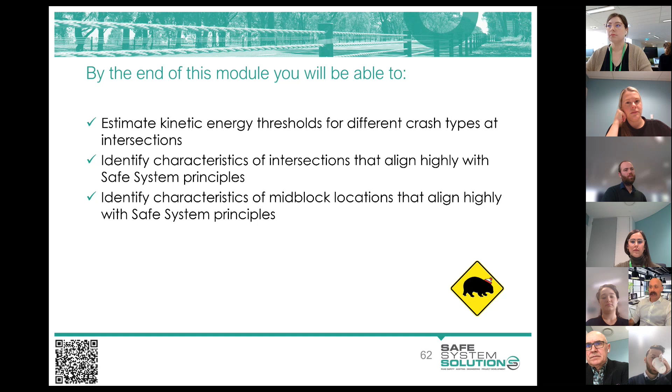So where are we at? Module 2. Okay, this one, we're going to delve a little bit more into those kinetic energy thresholds that we talked about. So that's that physical force that humans can take in different crash types before we break, and we'll hone into that at intersections. We'll look at characteristics of intersections that align highly with safe system principles, and I suppose by default we'll look at what doesn't align safely, and characteristics of mid-blocks that align highly with safe system principles or don't. Now, what I mean by mid-blocks, that's a term we would use in the engineering of a road environment. It is anything between intersections. It's mid-block. Now, don't forget to count your wombats, of course, and you would have seen that as one of your questions.

All right, here's a little first chance for a prize. There's an international formula for risk. Does anybody want to have a guess at that? Risk equals something and something else. Anybody want to have a guess at it? Type it in. No marks off if you get it wrong, but just a chance to win prizes if you get it right.

So it's likelihood times consequence, the international definition of risk. Now, this is not just road safety risk. This is risk: financial risk, health risk, environmental risk. It's really boiled down to the idea of what is the chance a bad thing is going to happen, and when it does happen, what's the magnitude of badness of that thing? So if you take economic risk, what is the chance the economy will go bad, and then how bad is it going to go?

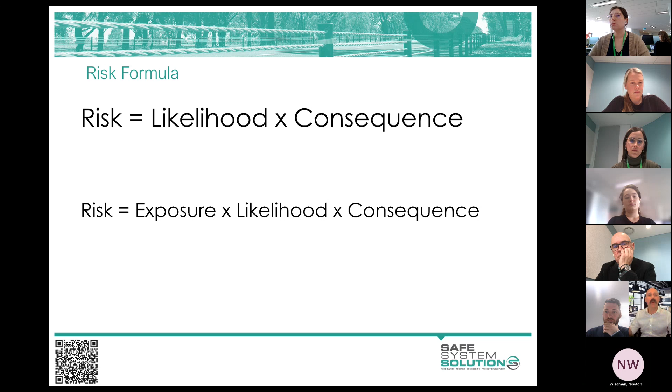What we've done in recent times is taken that likelihood and extrapolated out two elements, because in road safety we've identified that likelihood times consequence works quite well at isolated spots. But if you're trying to manage a whole network, you want to be a little more refined in how you come up with that likelihood. So exposure was embedded into likelihood before. I don't know why I got those extra little lines in there. It doesn't matter.

Likelihood always included exposure, but now it's separated out as a couple of elements within a safe system assessment, and it's actually filtering into quite a few other things in road safety. What I mean by exposure is really just how many people are exposed to that crash type. How many are driving through that intersection? How many are walking across the road there? How many are riding through? It's just the pure numbers of people exposed to that potential issue.

The likelihood then comes down to the characteristics of the road environment, the speeds of vehicles, the alertness or not of drivers and pedestrians, at that individual level. The consequence is how bad things are going to be. And what we do, especially in looking at infrastructure and how well it aligns with safe system principles, is analyze each of these: how many people are exposed to crashes here? What's the chance a crash is going to happen? And when it does happen, how bad is it going to be? And we actually multiply these out.

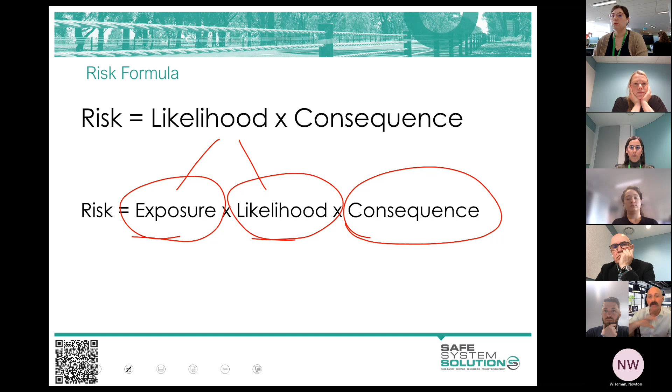Later on, maybe early next year, or if the world allows us, maybe late this year, I'm hoping to get there in person, and we'll go out and we'll do some safe system assessing, which is really putting this into practice in more detail. But for now, we're going to get you to do a little practice exercise on your own intersection.

So let's take each of these one at a time. And first of all, talk about exposure. Now, exposure, if you remember, is the number of people, whatever mode they're using, exposed to a crash type. Okay, and so if we can stop them being exposed to the crash, we change the exposure.

Now, Australia is just notorious for free access to fast roads, essentially. We love to just have all of our side roads feeding out onto our arterial roads, our state roads, our main roads. So this free access is leaving us with lots of exposure points to risk along our higher speed roads. And so what we like to do as a first thing within safe system thinking around the management of the road network is try to look at, can we start to close off some of these in order to leave us with one intersection with the higher speed, higher volume road that we can then address with some other measures to make it safe.

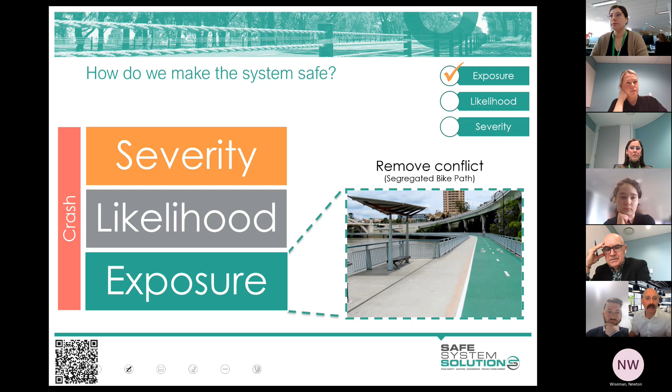So let's now jump to likelihood of crash. So that was trying to address exposure. Now, how do we alter the likelihood? These are things that we can put into the road and the road environment that help the human not crash. And this is actually one where we, as a profession, those of us who have been engineering the road environment, have got really good at it, and we've put a lot of effort into it over many years. We've really been going hard at this. And it's a wonderful combination of human factors and engineering and understanding vehicle characteristics as well.

There's so much subtlety in the road environment that people will never see and perceive. But there are obvious things that you see, like the line marking, the signs, the sealed shoulders, the audio tactile edge line. That's what people would often term a rumble strip on the side of the road. We call it audio tactile edge line. Technically, a rumble strip goes across the lane. So you may have driven over some rumble strips in your life. But that's just semantics. The community thinks a rumble strip is anything that rumbles as they go over it. So we'll just be aware of that.

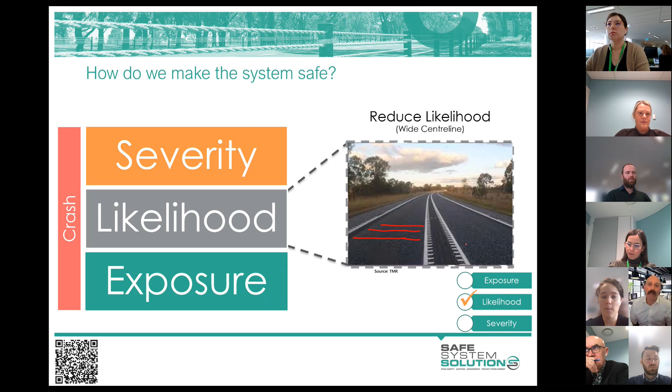And so anything we can do to bring them out of wherever they are and back to reality is a really exciting way to reduce the chance that they crash. And I'll talk to you about a few more things there. But another thing that can reduce the chance that people crash are the traffic lights.

Okay, so they do a pretty good job of telling people when to go, when to stop, and different ways that we can phase these and change them, and some exciting new stuff happening, like just a little one that actually, interestingly, we did about 12, 15 years ago, and it went quiet for a while, and then it re-emerged, which we call hold the red.

But basically what you do is, as vehicles are approaching, you have a radar that points at the vehicles, and you've got your traffic lights. So you've got red on the side road, and you've got green on the main road, and then the green goes to orange, and your radar is looking at the vehicles coming in and the speed that they're going.

And if your radar says, hang on, this one ain't going to stop, we call it a rogue vehicle. We go, this one ain't going to stop. Instead of your signals going to green on the side road and letting a vehicle into the intersection, we just hold everything red for a while until the rogue vehicle goes through this all red intersection.

We put a red light camera there as well, because we don't want to encourage this. But those sort of tweaks on what we've got there are amazing ways to reduce the likelihood of crashes. Okay, so those things are good. And signals are really good at reducing the likelihood of crashes. But they really don't do anything for the severity of the crash.

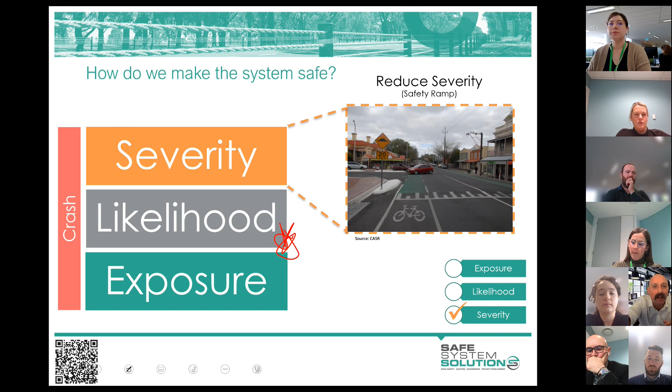And so you can see there on the screen, one is slowing vehicles down at the point that they could crash, and we call that a conflict point. At a conflict point, if we could slow vehicles down where there's a higher likelihood that they're going to crash, then we're addressing the severity as well.

Also, a barrier system. A barrier system is a wonderful severity device, because if you put a barrier system down your road, so take the Midland Highway, for example, lots of barrier going out there, you're actually going to get more crashes. You're increasing the likelihood of crashes, because all of a sudden now you've got something in the middle of the road and the side of the road that if you leave your lane, you're going to hit, right?

Beforehand, if you left your lane and you drifted onto the other side of the road, there's a chance that there wasn't anybody coming. In fact, it happened quite a bit. There was nobody coming. You'd wake up, you'd go, whoa, I'm on the wrong side of the road. You'd get back on your side of the road. You'd go, oh my God, all right, I've got to take a break or something like this, right?

Or you fell asleep, you drifted off and maybe overcorrected and shot over the other side of the road, into the paddock and just went, oh my God, right? There's no crash there. But when we put the barrier in, you're going to hit a barrier, right? There will be more crashes.

But the severity of crashes, so the ones where people weren't lucky and there was somebody coming the other direction, or there was a tree that they hit, or they rolled over in the roadside, the severity of those is so bad that now we reduce the severity so significantly because they hit the barrier and they run along the barrier and they dissipate their energy over time.

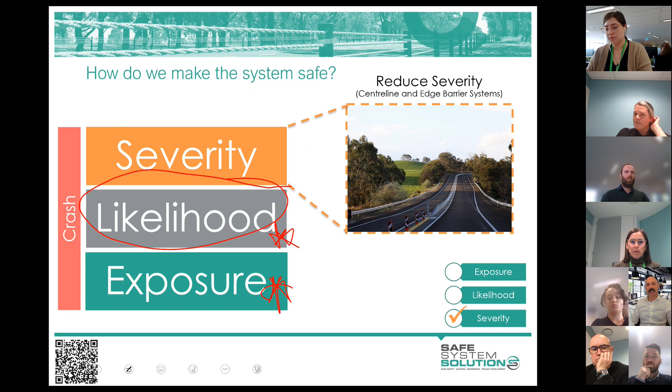Do everything we can to reduce the likelihood, but don't stop there. Say now, even though we've done all this awesome stuff to stop people crashing in the first place, there's still going to be crashes. How do we make sure those are within tolerable limits? So there are sort of elements to understand how we get good alignment with safe system principles. Anybody got any questions on that before I sort of hone in on intersections?

I have a question because I'm thinking about my intersection. Good. I'm pretty sure there's like a legal limit where you can have traffic signals in a row, isn't there? Like spacing. Is that right? There's not legal limits. There's guidance on how close they should and shouldn't be. You don't want too many close together for a number of reasons. It's mainly driven through traffic efficiency, the amount of stops that somebody would have to go through. So your traffic operations area is probably driving a lot of that.

From a road safety perspective, we don't like it for something we call a see-through effect. Because if you're approaching a set of traffic signals and there's another one very close, sometimes people will see the one in the distance and they'll run straight through the one close to them without sort of perceiving that. Yeah. Okay. But yeah, proximity is an interesting one. So the one you're thinking about's got some close signals together?

It's got some close traffic signals, but one of the traffic signals is for a pedestrian crossing, not for traffic control of cars or anything, and then there's an intersection up the top that has cars coming through that is quite dangerous. And I think there should be lights there rather than down near the crossing. But anyway, I'll show you. Okay. That sounds like a really good one for you to do a little bit of thinking about the severity and the likelihood, the exposure. So yeah, that'll be good.

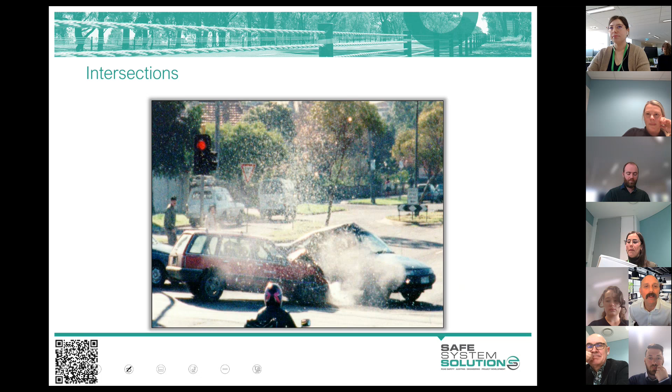Let's talk about intersections in a little bit more detail, and then I'm going to get you to do a bit of thinking about a hypothetical intersection, or actually it is a real intersection. So these are some high-level principles that Monash University Accident Research Centre came up with, and I think that they are really nice thinking points around intersections. And interestingly, the first thing they say is, can you get fewer vehicles? They haven't even jumped to the intersection.

But can we do things like mode shift? Can we get people onto safer transport modes? Can we reduce vehicles going through this intersection? And that's quite an interesting starting point. We often think about that from lots of other transport objectives, getting people into lower carbon modes and those sorts of things, but fewer vehicles. Then into fewer intersections, which we talked about. Now, both of these are addressing exposure.

Then we go into fewer conflict points, and conflict points, remember I used that term, are points where crashes can happen. And this is into the likelihood. And then we get into the severity. We want to change speeds and angles to biomechanically tolerable levels. We talked about that last session, where we were looking for that 90-degree crash, that right angle crash, within 50 km/h or below. If we can get a little bit more angle on that, we can go a little bit above 50.

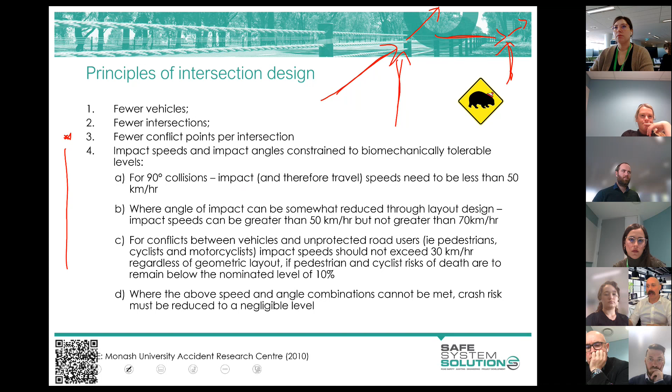And at around 80 kilometers per hour, we can't feasibly operate an intersection where we have that if it is a change in speed. We would call this a delta V. Again, I'm using some physics language here. Delta is change in, so your little triangle sign, delta, change in velocity, change in speed. I'll explain that, because we can operate an intersection well above 80 kilometers per hour, as long as we get the vehicles to be going at similar speeds.

This is like an on-ramp, right? You can operate an on-ramp and the intersection there very fast, 100, 110, 120 if you want, as long as you give the opportunity for one vehicle to get up to speed, so when it hits the other vehicle, there is not a speed difference that is outside of our tolerable limits. So accelerating vehicles has this wonderful benefit from that exchange of energy perspective.

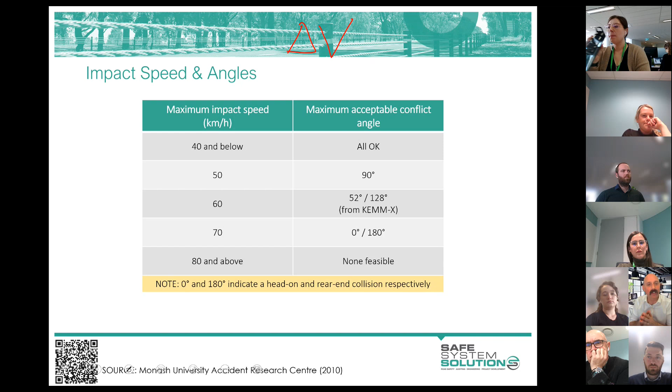So we often look at the angles that crashes could happen at an intersection and we often would draw diagrams. Here's a new intersection being planned. So we just quickly angle it out and say, yeah, okay, that's going to be about 100. And this is very precise, but you don't even need to be this precise. You can just go, yeah, okay, a vehicle coming out, one hitting it, that's about 90 degrees. As they turn, it's going to be a bit more shallow angle. And we can look back and we say, okay, 90, that's about a 90-degree crash, about a right angle.

Okay, well, can we aim to get speeds of those bullet vehicles? Those bullet vehicles being the ones that are going to do the damage. Right? The ones coming out aren't bullet vehicles. They're target vehicles. They're the ones that are going to be struck because they're not going to have the speed because they're facing a T intersection. They're going to slow down. The bullet vehicles are just traveling along. What's their speed? Can we manage their speed to within around that 50 kilometers per hour mark? And the other side of the road, we could probably get up to 60 kilometers an hour if we wanted, because you're going to get more angle on that crash when it happens.

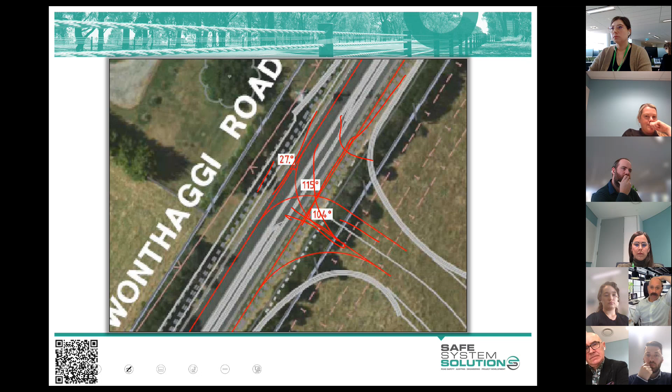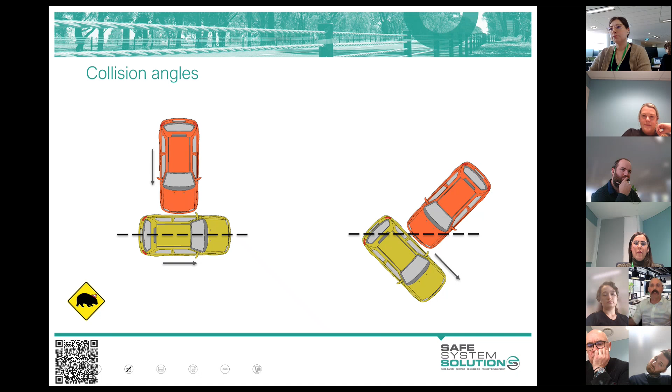The other thing we sort of need to think a little bit about are these secondary crashes that I alluded to. So we have immediate conflict happen between passenger vehicles, and then at an intersection, they will often go into a secondary crash. And this is some research that was done by the Centre for Automotive Safety Research in the University of Adelaide there, CASR, showing a vehicle, and you've got a vehicle and they come in and they meet at an intersection. So they sort of replotted all these crashes that had happened.

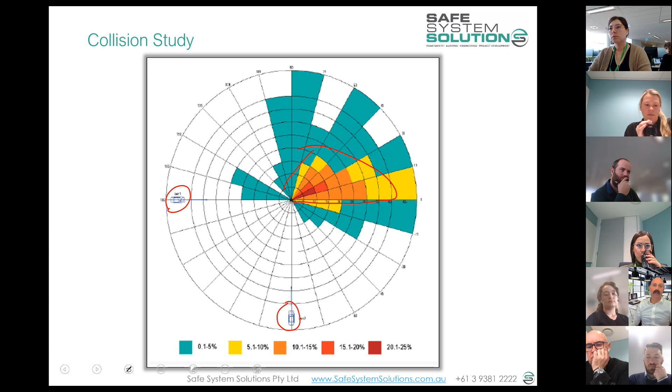And the secondary crash where death and serious injury occurs, fairly obviously out there. I don't know if they needed the research to tell us this. It's fairly obvious where they're going to go. Occasionally you get some clip off and people avoiding crashes and the like, but generally that's sort of where we're going. So we need to think about the rigidity, how harsh the roadside is around intersections as well. It's not just that crash between the vehicles.

Anybody got any questions before I jump into a little exercise and make you do a little bit of pondering? Okay. So here is an intersection. And I'm going to talk you through it, explain a little bit about what it is, show you some pictures of it. Your job is going to be to redesign this intersection and to eliminate death and serious injury into the future, or get us as close as we possibly can to elimination of death or serious injury into the future. Okay, you're going to get a certain amount of information and I'm going to be able to answer questions for you, but you're going to come up with ideas on how we do this. And I'm going to constrain you with a few little things.

So this road is a major road, right? It's a major highway. It carries 20,000 vehicles a day. It carries trucks, buses, motorbikes, cars. And it's got a 70 km/h speed limit. This is a bus stop. This is a shared path, bikes and pedestrians. These are all houses, residential area. This thing here is a culvert, so it's a drain. Basically, the water goes under the road at this location, so it sort of flows in here and floods out into this area when it rains heavily.

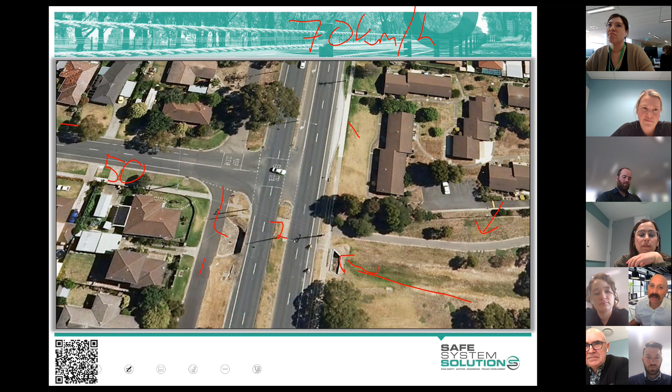So that's the second constraint. And the third one is, you are operating in the current political and organizational environment that you're in. So if you propose something highly radical here, and I encourage that, I might ask you a little bit about how are you going to get that through the Department of State Growth system, and convince the traffic engineers and convince your minister and the local member and the community. Have you got any tricks, any ways that we might be able to get this one in?

So, you know, if you say, well, it's 70 kilometers an hour, I'm going to make it 20 kilometers per hour through there. I'm going to say, okay, big speed reduction on our major arterial road, and it could be quite controversial, very controversial, I'd say. What's your plan? How are we going to get this through? So there are your three constraints. You got $3 million. You can't close the intersection. And you're in the current political and organizational context.

So how much for a roundabout? What a lovely question. Okay, Austroads has some guidance on how big a roundabout should be at these locations. And in order to get a roundabout that meets the Austroads guidelines, it's going to cost you $7 million. I know, that's a lot, isn't it? And you might go, surely it can't cost that much. Well, it's a very big roundabout, because we've got to get the biggest vehicle, a B-double, which is a truck with a second trailer behind it, to be able to turn around this. And in order for that to happen, it needs a huge area. So we're actually going to have to build this big roundabout.

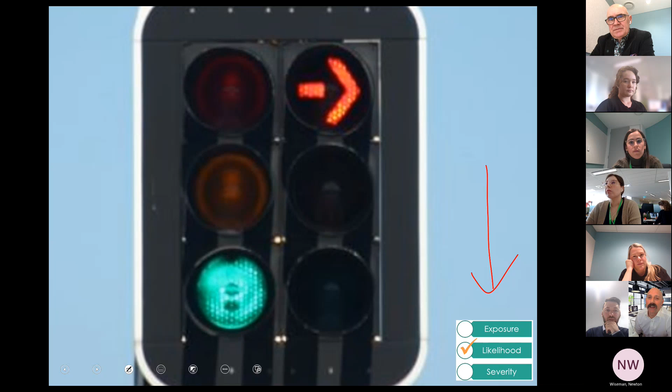The idea of traffic signals came up, and the idea of a roundabout came up early on, and then we decided that was too expensive. But traffic signals came up, and I've got the little reminder here, that they are a likelihood treatment, right? And they do a good job. We know that probably at an intersection like that, we will reduce the fatal and serious injury crashes by about 45% with the installation of traffic signals. Right, but that leaves 55% still happening, doesn't it? So that's not good. We don't want that.

And I did this little heat map, and this is just using publicly available data for death and serious injury. I've done it for outer metropolitan Melbourne, but you can do it for outer metropolitan Hobart or Launceston or Burnie, anywhere where the speeds are a bit higher and you've got traffic signals. Each of those hotspots is death and serious injury. So these are where people have been killed and seriously injured, and the bigger the spot, the more people are being killed and seriously injured there. Every one of these is a signalized intersection.

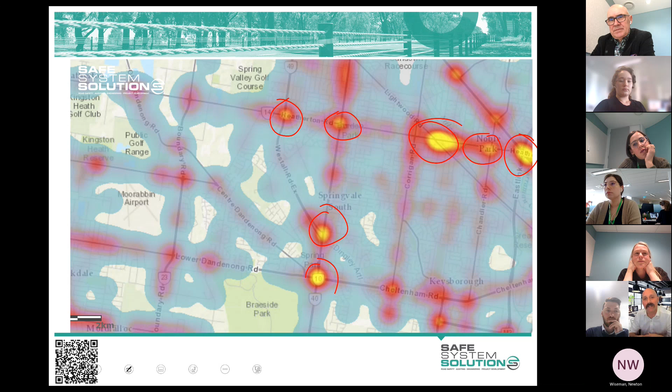And it's quite interesting because we think of traffic signals as sort of this ultimate form of intersection treatment before you can actually do a grade separation, a flyover, an overpass, right? So we get to that point. And then we sort of go, well, if they can't stop when it's a red light, come on, it's on them. But the reality is that our safe system says, no, we've got to do something about this.

And there is a certain stupidity in us continuing to build signalized intersections in high-speed areas and somehow expecting that they're going to perform and people aren't going to run the red light and aren't going to have crashes and be killed and seriously injured. We know it's going to happen. So this is quite an interesting change.

And I spend a lot of my time now in robust discussions with traffic operations engineers because they love a set of traffic signals because it gives them more control over the network. They can turn this one on and move this one around and tweak their pattern of flow and how things move. But we've got this residual death and serious injury that we need to start acknowledging and addressing.

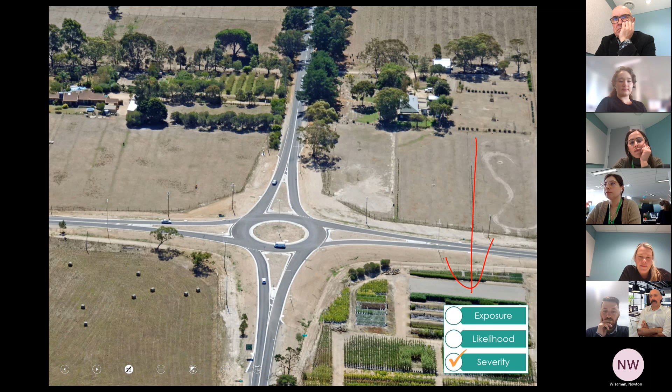The roundabout. Now, this is an interesting one, isn't it? The roundabout addresses the severity of the crash. Okay, now we're into something. Now, why does it address the severity of the crash? I'm going to come back to that shortly. Roundabouts don't need to be that big. I said, well, if we're going to follow Austroads, it's going to have to be big. And yes, Austroads does that, but we can have small roundabouts, very small roundabouts. Obviously, a very different road environment here.

But you can have small ones. You can have ones like this that you don't even actually have a roundabout and you've just got a painted roundabout. I mean, it is a roundabout, but you could just drive straight over that if you're in a large vehicle. And sometimes we put ramps on the approach to slow people down at the roundabout and those sort of things.

But why are roundabouts better? Why do we see actually around 80% reduction in death and serious injury if we had put a roundabout at that location, whereas with the signals we were only getting 45%? Roundabouts are hugely superior in terms of their safety for passenger vehicles, right?

This is a conflict point analysis, a very simple conflict point analysis. Each dot there is a way that a driver, and this is just for vehicle to vehicle, can be killed or seriously injured. Or they can crash. The red ones are the crossing ones, which are worse. But you see there, just the sheer number of ways that you can crash at a roundabout is far less compared to traffic signals. So that's one big advantage.

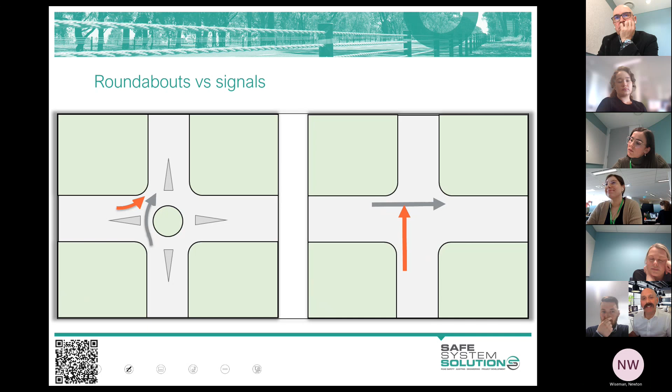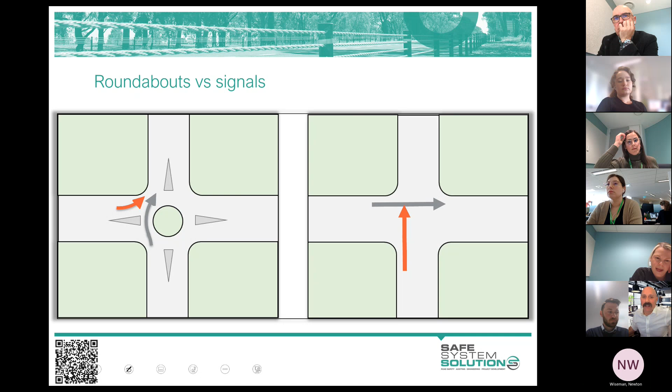The second one is the angle that we crash at. And remember, I talked to you a little bit there about your vectors and the energy. We're getting the angle now. So that's a much better one at a roundabout. And this one sort of intertwines two things. One is speed. And the second, with the yawning person, is that amazingly, when you put a roundabout into an intersection,

people approaching it in their completely phased out state of mind, they come back to reality. They look around. They slow down. It's like we bring them back from wherever they are and they're present. And they then are looking around and they slow down, and they have to slow down to navigate the roundabout. So this is just a wonderful win.

Unfortunately, with a set of traffic signals, we have a bit less of that. There is a tendency for some people to just drive straight through a red light. They just miss it. They just drive straight through it at the speed they were going. And sometimes they even accelerate through it because they are catching the end of it, or in the rut, and then off they go.

So a roundabout is just this wonderfully superior intersection treatment from a passenger vehicle perspective. We'll talk about cyclists and pedestrians and how to make roundabouts safer for them in the next session. But roundabouts are really wonderful. Any questions or comments at this stage?

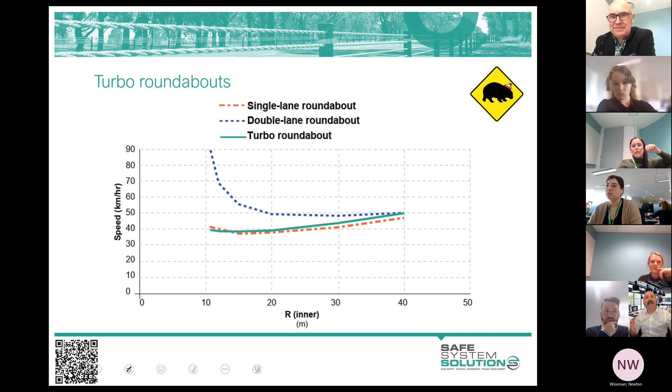sometimes we like to put signals around a roundabout. What's the roundabout in Hobart there on the way in, just over the bridge and down? It's a signalised roundabout, isn't it? It's a good one. Does it have a name? The railway roundabout? Railway roundabout, that's it, yes. So we can signalise roundabouts and we slow people down and we get better performance. But with multiple lanes it starts to get a little bit more challenging, and you have a few different troubles.

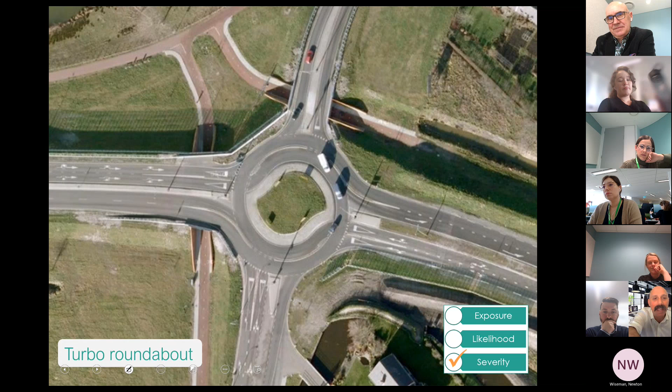I just thought I'd show you out of interest. You may not have ever seen this. This is what we call a turbo roundabout. It's actually got separated lanes within a roundabout. On the approach and through the roundabout, you separate out the lane. So you want to do a right turn, you get into the right lane and you go into this separated area and you continue around and out.

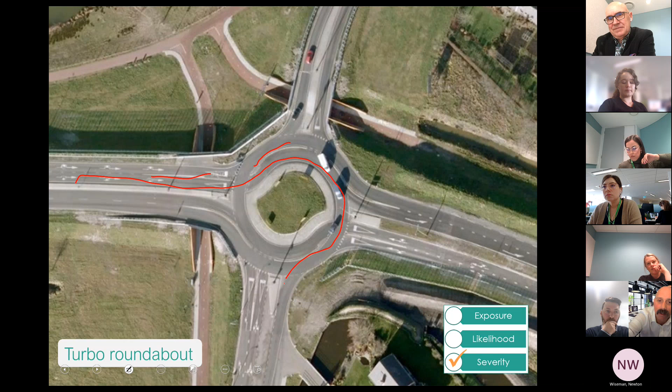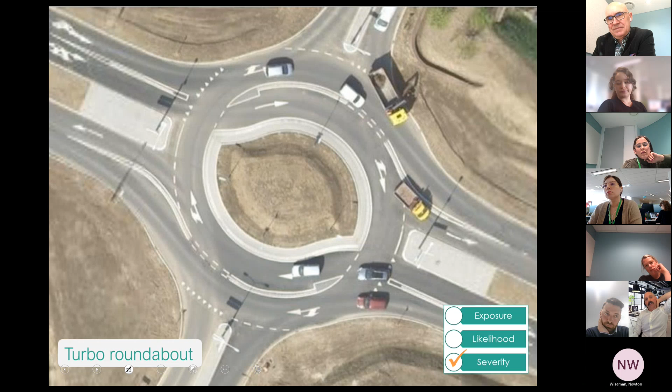It's quite sort of new stuff. We've got a few of them now in Australia. They're a bit rare in Australia. I love this photo because you've got a nice turbo roundabout, and look here, you've got a truck that's obviously come out. You've got a car going in there, and what I'm seeing here is low speed. I'm sure it will be low speed, right?

And the angle is just beautiful. So if that car does hit that truck, at a nice angle, we're going to have, you know, a bounce off, right? It's just good from a safety perspective. Of course, people are making mistakes and come out when they shouldn't. But if this was a set of traffic signals, we'd have the same sort of mistake making. It would have been high speed, and it would have been potentially death and serious injury. But it's all happening now slow and at good angles.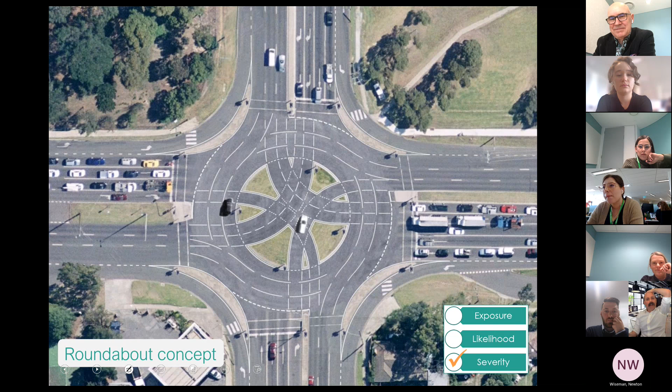And we then start to get interesting ideas for signalised intersections. Sorry, this is a mock-up. This hasn't been built. But the reason people are coming up with these ideas and these mock-ups is because there's an existing signalised intersection, and they're saying, how do we slow vehicles down and improve the angles, but still get this capacity? How do we still make the traffic operations engineer happy enough that we're still going to pump as much traffic as you need through this, and you can still control things with your signals?

And so the idea is that a vehicle approaching here will switch back on. They'll wake up because there's physical stuff there. They'll improve their angle a bit. So if we have crashes, they're going to be better. They're going to be slower. So lots of exciting concepts coming up. And they're all around us now, starting to say, how do we reduce the severity of crashes if people are going to make mistakes at these signalised intersections?

And Craig made an interesting point about, could we do something raised? Could we do a raised intersection, a raised platform, a raised something there? Is that another way to slow people down through this intersection? And that will address the severity of the crash. The signals themselves are going to reduce the likelihood, but now we're looking at the severity as well. And that's what they proposed at that intersection you were looking at.

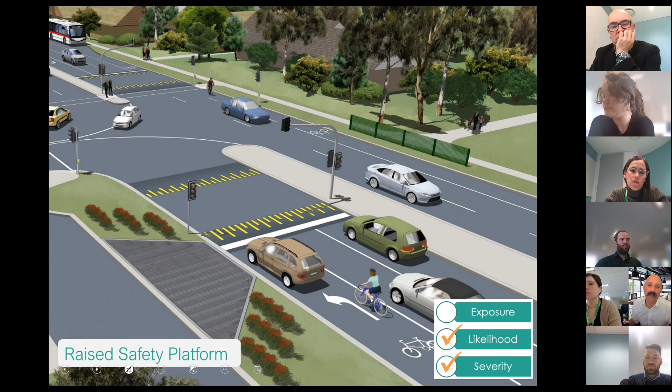And it just sort of dawned on me especially, I was like, these people are crazy, because when that roundabout's in, they're going to have to go through there at about 50 kilometres an hour. It's going to be more impact on them. But they just see that as their choice to slow down rather than us mandating it on them. So if you're able to utilize infrastructure to get your speeds, it's sort of better.

So then they built that, and there it is there. And you can see there the 50 km/h advisory speed. That's the one, hey, that's what we suggest you do. You don't have to. We're not going to fine you if you don't, but there it is. Another 50 there, and lots of advanced warning, telling them go 50, speed hump, raised platform coming up. I should have said speed hump.

In fact, that's one thing I always point out: this is not like your local urban street speed hump. This is a more gentle platform, right? We're trying to get vehicle speeds to around the 50 on this one. And we can just tweak the angle of the ramp to get different speeds that we want.

And the reason they chose 50, and have a think about 50, 50 is that right angle car impact threshold speed. So if a car comes out of here and is struck by a vehicle here, well, let's bring it into 50, and it's that tolerable sort of speed. Now, you're right to point out pedestrians and cyclists, they're not going to get the benefit of that. There was a lot of analysis done on which is the riskiest road user. I didn't give you all the volumes and things like that, but that's the one that they were targeting.

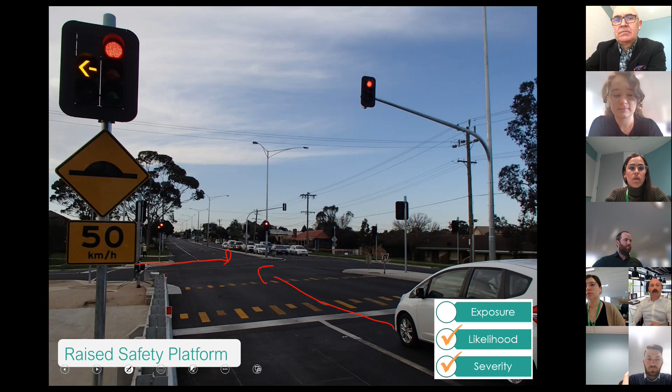And I love this, this is just a beautiful picture. Cars braking on the approach to a green light. And people sometimes go, oh, that's just inefficient. I'm like, well, at a roundabout, we've got no problem with braking and slowing down and then accelerating up, do we? We just have never had to do that at a signalised intersection. But it's wonderful. So these are really exciting, and we're absolutely loving them.

There's another thing in road safety, and we call it the dilemma zone. And I guarantee you've been in the dilemma zone if you're a driver. The dilemma zone is a point in time and space when you are in a dilemma as to whether to put your foot down and go through the traffic signals or brake and stop because they've gone orange. Its official term is the dilemma zone. It's a lovely name, whoever named it.

But what we find is that the dilemma zone significantly reduces with a raised platform because people just decide to stop. It pretty much makes your decision for you. It goes orange, I'm going to stop, because if I put the foot down, it's going to damage my car and I'm going to jump up. And now we're seeing raised safety platforms being deployed widely at large signalised intersections in Victoria especially, and New Zealand. Tassie hasn't quite got on board yet, but I'm excited for it to happen.

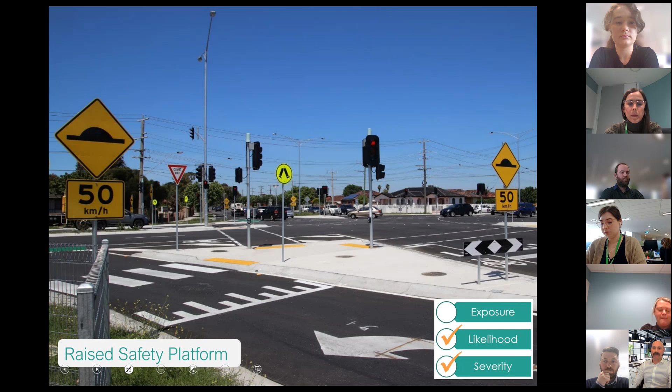And really, the running of red lights, we don't want it to happen, but it just continues to happen. You can put up red light cameras, you can put up mast arms, you can put LEDs, do good line marking, people still run the red light. There are a few less that run the red light, but this still happens.

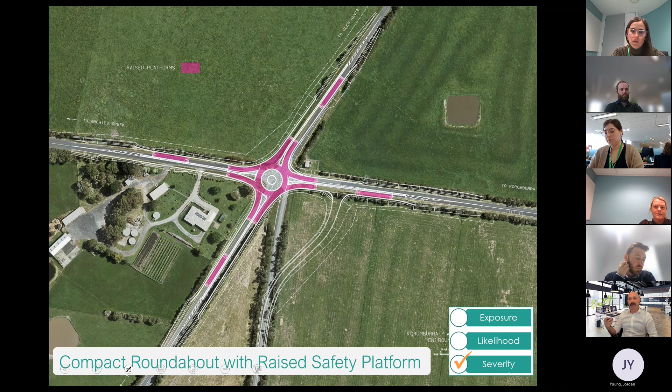I'm not going to talk to you long about this one either, but essentially, we talked about roundabouts, and it's really important to try to continue to look at how do we get roundabouts in if we possibly can. Now, this one's more for your traffic engineer, road design, highway design engineers, they really get excited about this one. But essentially, it's a smaller roundabout than it should be, much smaller, okay?

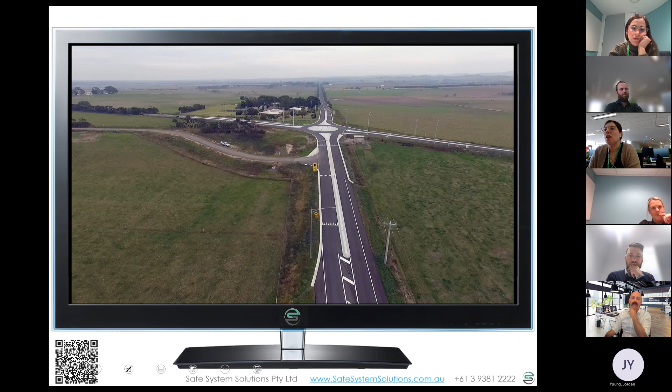So the roundabout really should be sort of this big, and then you'd have these reverse curves in. So you'd be acquiring big bits of land and lots. You'd probably have to buy this house out and the like. But they're starting to say, how do we get a similar thing where people are approaching this intersection, they don't believe they have ultimate priority, they wake up, they slow down. Anyway, they built this, what is called a compact roundabout.

And here's a little bit of drone footage for you. You can see it's actually a very small roundabout in the middle. Very small, tiny roundabout in the middle there. And then it's got what we call a concrete apron. It's actually a big concrete area that trucks can drive over. So that reduces our need for that massive roundabout for them to go around, because they can track over that.

So we talk about a swept path of a vehicle. Basically, if you ever get to watch a big truck turn a corner, you see how wide they need to go and they sweep around. It's called their swept path. And so we're trying to cater for that in different mechanisms. The traditional way is to make your roundabout massive.

But these are pretty exciting techniques to try to reduce the cost, right? This one was done for about 3 million. Still expensive, but when we're talking about usually 7 million or so for something like that, we're getting some good savings. Questions, comments at this stage?

I need to go to the bathroom. Okay, let's have a short break. Actually, I sort of skipped the break. I usually give you the break when you're doing your exercise. So we'll take a short break, and then I'll whip through a few things at the end and then tell you your assignment. So let's take a few minutes now, and then I'll ease back into it.

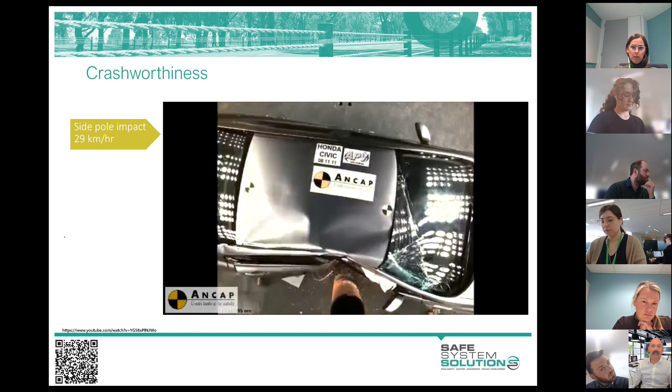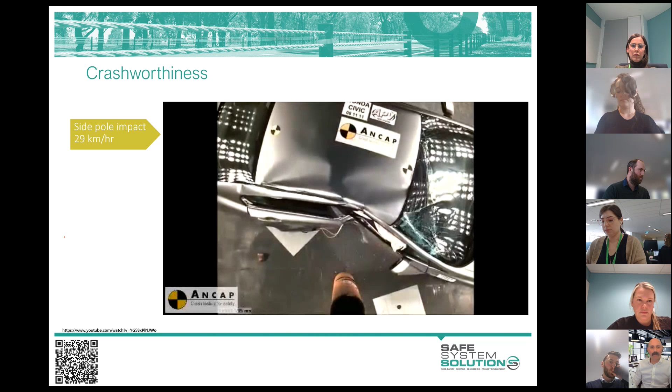We know that side impact into a pole or a tree is highly severe. So there's the ANCAP 29 kilometre per hour test. It's gone up to 32 kilometres per hour, as I think I mentioned to you. It is not fast. The side of a vehicle striking a tree is a horrendously violent event. And our cars are not designed for it.

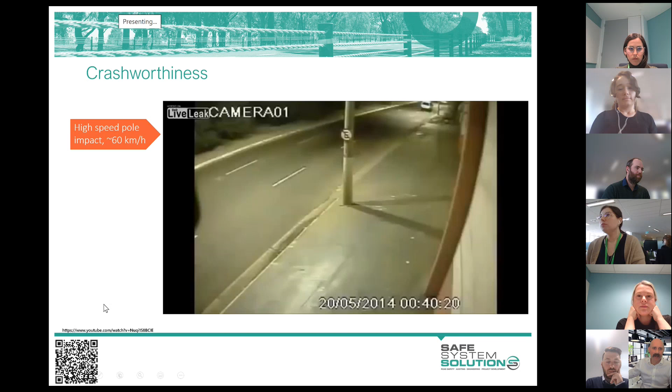This has been estimated from the video frames and that sort of stuff as a 60 kilometre per hour crash. Now, this is sort of showing the violence. So you can see the energy dissipated, and that's estimated at about the 60 kilometre per hour mark.

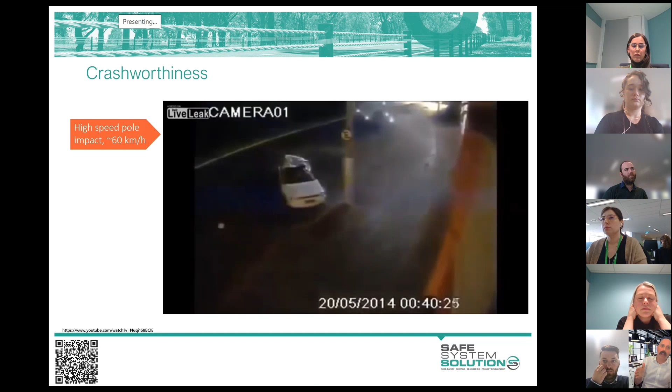So we know that when we've got roads operating at 100 kilometres per hour and we have people falling asleep and leaving the road, it's not this clean, clear drift off into a tree. The mechanics of a run-off road crash or a head-on crash most often is the driver falls asleep. They drift off the road because we usually make our roads camber out a bit so the water drains off. They wake up and they're off the road, and they panic, as you would if you're off the road traveling at 100, 110 kilometres an hour. And their first instinct is to pull the wheel back and get back on the road.

And what that does is it starts the vehicle yawing, and yawing is the sliding. And then they go into this sliding motion. So what we're actually doing is exposing the side of the vehicle to trees, to power poles, and the vehicle to a rollover mechanism. Sometimes they yank the wheel back and they fling straight over the road. So we get run off road to the right. Even though they drifted off to the left, they run off road to the right. Sometimes they head-on crash as they come over.

So it's actually quite a chaotic scenario. Often people just imagine it as a driver's asleep, they drift off, they hit a tree. No, it's out of control. And so that's why the side of the vehicle becomes so interestingly important.

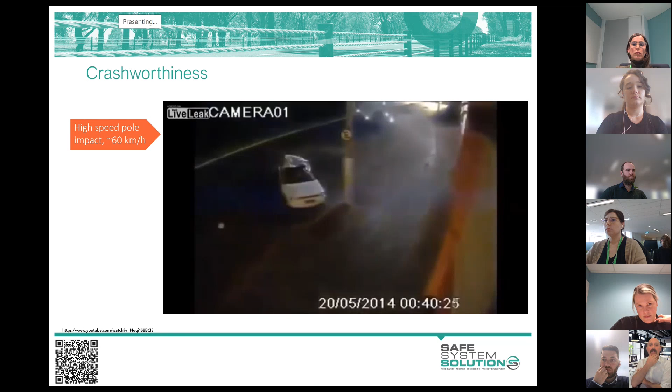So the past technique used to be to create this thing called a clear zone, right? A clear zone used to be an area from the edge line where you clear all of your trees and power poles and anything fixed. And we used to calculate clear zones. For high speed roads, it was like 9 metres from the edge line, maybe 10 or 12, depending on whether it was on a curve or not. And back in the day, that was probably the best we could do.

Nowadays, we have amazing barrier systems that actually perform better than clearing those trees. So hitting the barrier, if the barrier is about 4 metres from the edge line, is far safer than taking your luck in this cleared area, because some vehicles will go further than that. Some vehicles will still shoot back onto the other side of the road. And some vehicles are going to roll over. As they try and get back on the road, they start sliding, the soil catches on their tyre and they'll start rolling. So clearing the roadside helps, but it doesn't eliminate death and serious injury.

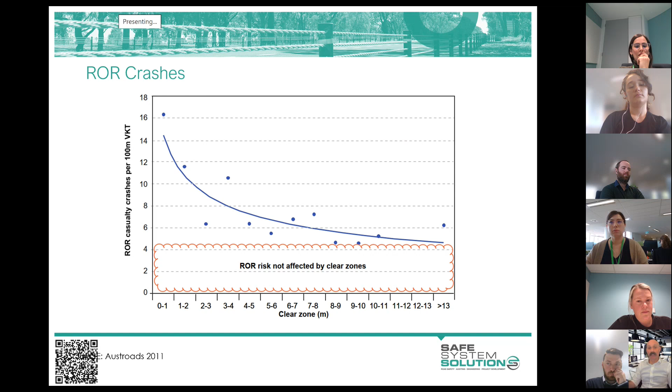It doesn't get us anywhere near as close as putting a continuous barrier system in. The other thing is that we are not in the space of chopping down trees anymore, right? That's not what we want to do. And so we can get a safer outcome. We can save more trees by just putting continuous barrier systems down, and we can save lots of lives.

So clear zones have been an absolute institution since about the 1960s in the management of a road and roadside. So it's another one where your institutional traffic engineers and road designers will say clear zone is what they've always done. And so to tell them we're not doing clear zones anymore because that's not the best thing we can do, they get angry.

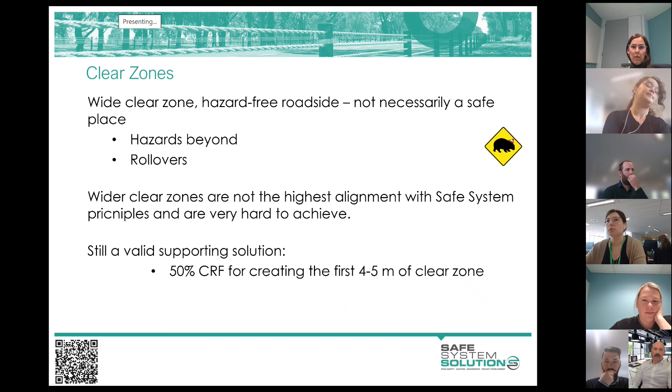But they're not necessarily a safe place to be. And they're not going to give us the highest alignment with safe system principles, but they do provide some advantage. But the reality is we pretty much can't do them anyway. So roadsides like this are kind of a thing of the past.

This is probably what they would have built the Midland Highway to if we hadn't progressed our thinking around continuous barrier systems and the like, which is basically you just duplicate the thing, you clear your trees out to 9 meters or 12 meters. You provide this big wide median and this area to recover. It's all good except for the 15 to 20% that don't recover.

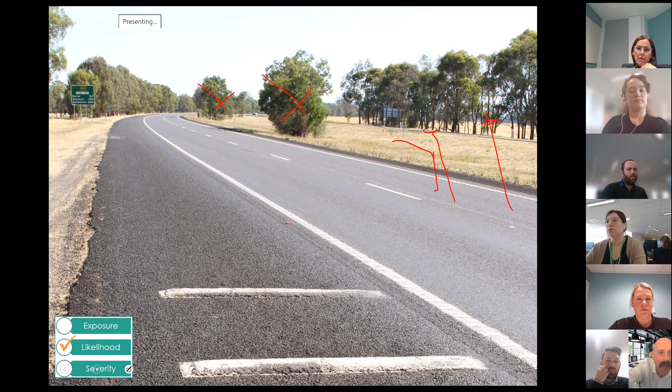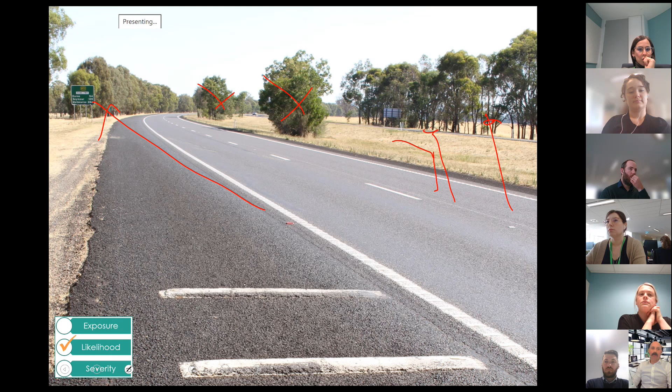They go all the way across, they hit vehicles coming, they go into those trees. And we have been for 50 years building these road environments, which are better, don't get me wrong. It's far better than 1 lane in each direction or 2 lanes in each direction with a separated centre line. But we can do much better with these narrower cross sections, less land, less trees chopped down, and these continuous barrier systems. And that's part of Austroads' new guidance in Part 6.

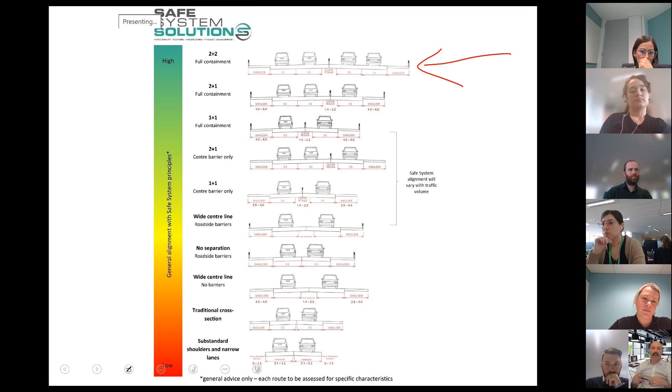But really, what we aspire to are these barriers each side. People call it the bumper bowling of roads. We don't want you to fall asleep, we're going to try and stop that, but we'll catch you. It doesn't matter if you've dropped your coffee in your lap, you're falling asleep, you have a seizure. The road is trying to protect you. So it goes down in safe system alignment from there. I'm not going to go into the detail, but lots of different cross sections.

You know how your fridge has an energy star rating? We do that for roads too. There's an international system for star rating the safety of roads. It's called iRAP, International Road Assessment Program. AusRAP is what we do. We do a lot of that official star rating; we're accredited to star rate. This road cross section, you can't quite see it, gets 4 stars. That's not bad, it's good.

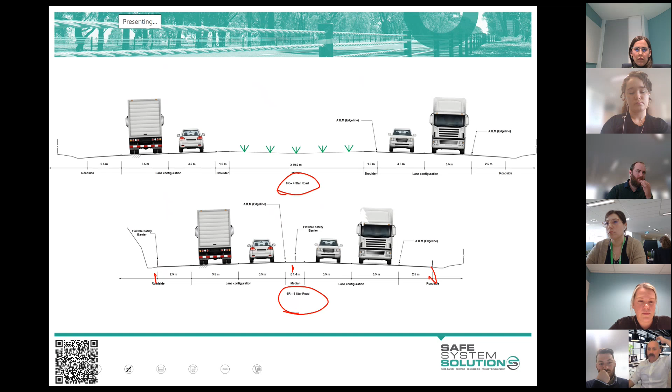It's far better than the 1-star roads, like that picture I showed you with the trees; that's a 1-star road basically. This is about a 4-star road for a whole lot of different reasons, clear zones and all of this. But this is a 5-star road, and it's got the barrier, the barrier, and the barrier. And that's basically what takes it from 4 to 5. So that's our ultimate style cross section.

But we've got to think about how we roll it out, the community interface. I'm sure you'll get kickback from the Midland Highway and other jobs where you roll out this barrier. The motorcyclists get angry. Sometimes you've got barrier too close to the road, and they feel they can't pull over if they break down. We need to get better at this as engineers, and some of your roles are going to be in a good spot to help us, because a lot of engineers just look at the data and say this scenario is extremely safe, but the community doesn't see it that way. They get very angry at this.

The reason it's very safe is the biggest risk on this very low volume road before those barriers went in was leaving the road and hitting trees. Head-on crashes were unlikely because there wasn't likely to be another vehicle coming. Putting this in, yes, there's an increase in risk if you break down, or the kid in the back throws up and you pull over, that a car will run into the back of you. But it's actually quite low risk from a pure data perspective.

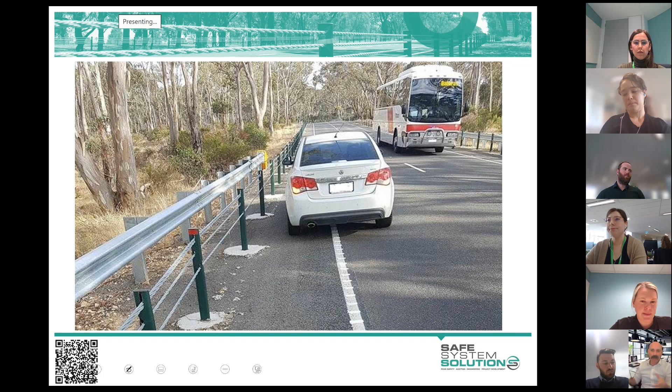But gee, the community went feral. They absolutely did, so we redesigned the road. So thinking through and talking to the community and doing what we call context sensitive design, I think, is an area where your road design engineers, your engineers in departments, need help. But anyway, I won't talk much more about it.

I'll finish with this example of energy management in a really good way, and then I'll give you your assignment. This is an incident that happened in Mildura, so regional Victoria. It happened about 2:30 in the morning, in an old Ford, with 4 young male passengers. I think you get the picture of the behavioural challenges there.

And they went through a roundabout. So even though roundabouts do a wonderful job in the majority of cases, in this one they were, I would say, intentionally going through fast. One of the advantages, I think, is that if there was a vehicle coming up from the other way, they would have slowed down and stopped, and there would have been unlikely to be a collision.

Anyway, they went through, they lost control, they hit a power pole. A very old vehicle, a 1-star safety rated vehicle these days. And they hit it at a predicted 90 kilometers per hour based on the forensic crash investigation. The power pole had what we call a raptor cushion around it. So a raptor cushion has kind of got a honeycomb center.

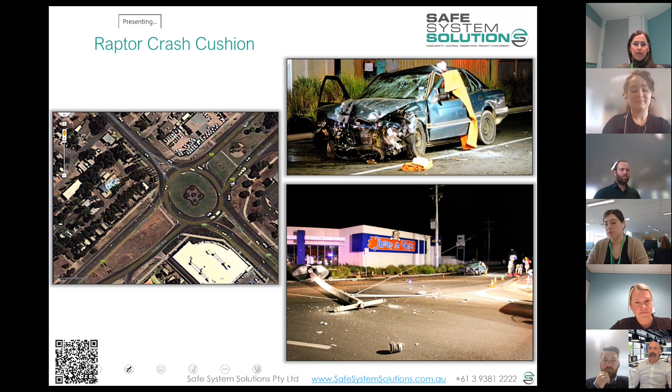So all those 4 passengers survived. There were some minor injuries. They are leading a normal, healthy life because they had that energy management. I mean, the pole came down as well, but it rotated. But if that wasn't there, all the reports on this say some of them would definitely have been killed or had very severe injuries.

So I think it's a nice example to end on, but really to me, the biggest change in the management of the road system is an enhanced focus on the severity of crashes.

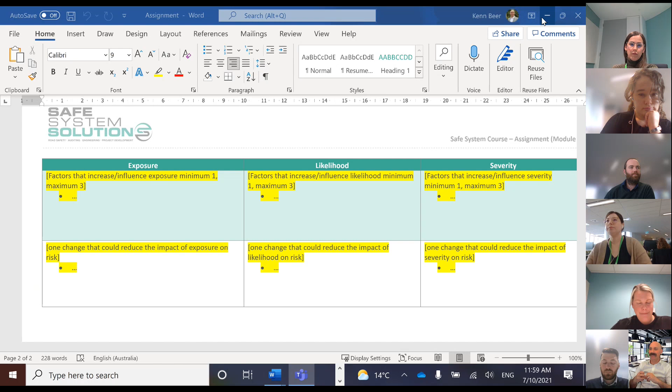All right. Sounds like you're all happy. You know where to find it. You'll do your quiz. And yeah, thanks for your input today. Well done. And I hope you had a bit of fun thinking like an engineer for a little bit there.